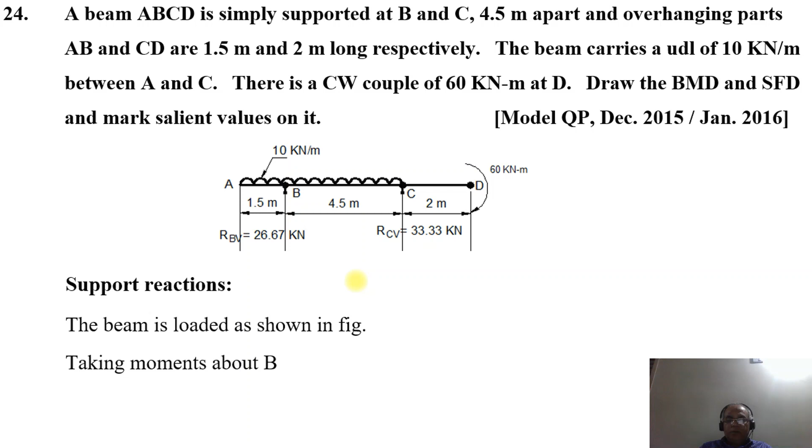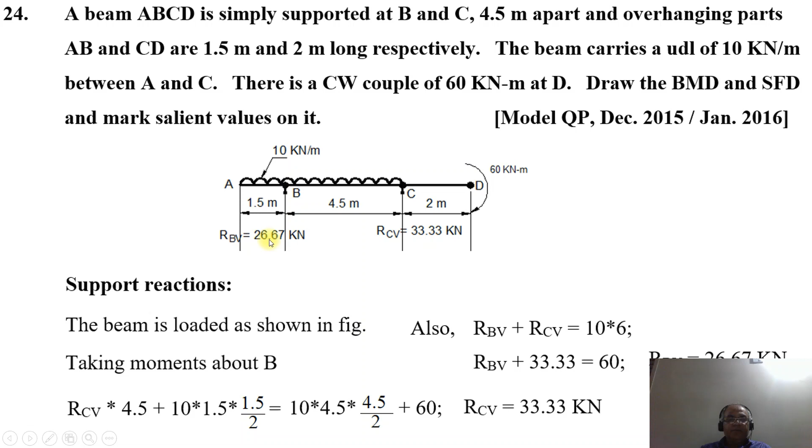And then also we know the sum of the vertical reactions acting upwards will be equal to the sum of the vertical loads acting downwards, which is 10 into 6. Therefore RBV will be equal to 60 minus 33.33, which is 26.67 kilonewton.

Now we are going to analyze this problem stepwise. Considering between A and B, with a UDL of 10 kilonewton per meter over 1.5 meters, and without considering the vertical reaction at B, SF at A will be equal to 0, and SF at B will be minus 10 into 1.5, which is minus 15 kilonewton. So from A it is 0, and at point B, without the vertical reaction, it will be minus 15 kilonewton.

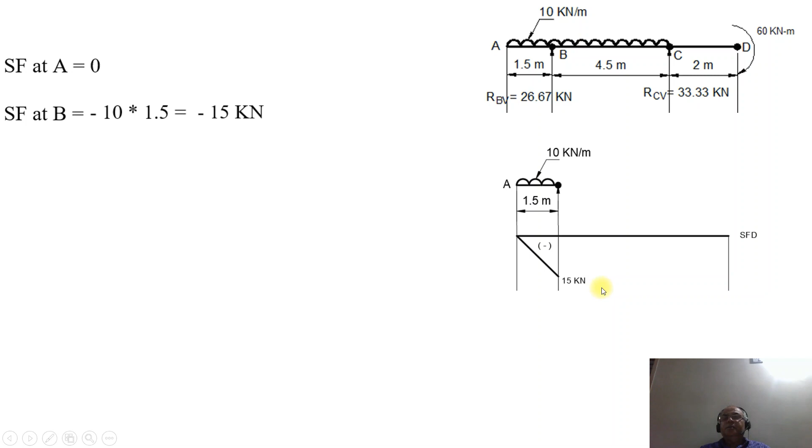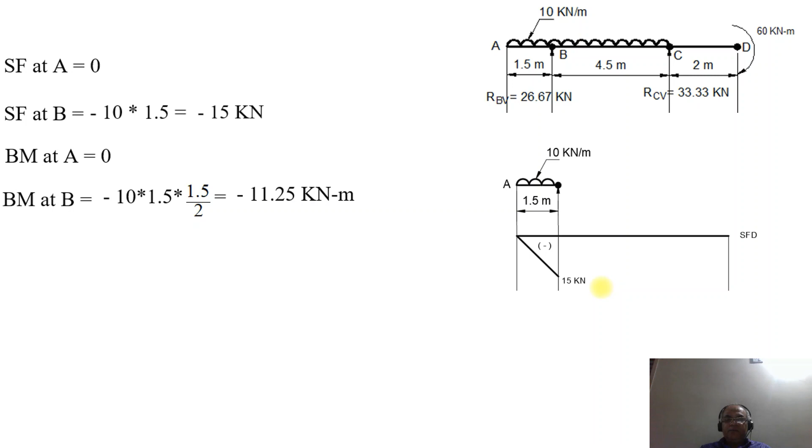Similarly, the bending moment at point A will be equal to 0, and the bending moment at point B will be minus 10 into 1.5 into 1.5 by 2, which equals minus 11.25 kilonewton meter. So the bending moment varies parabolically from 0 to minus 11.25 kilonewton meter.

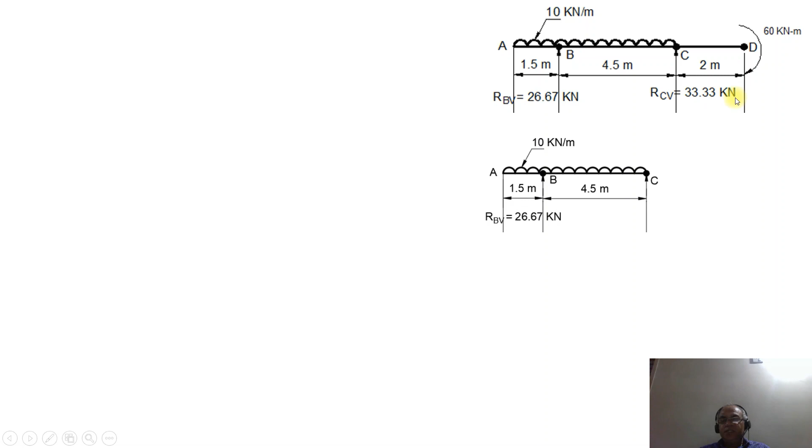Now considering the second part, we have RBV of 26.67 kilonewton acting upwards, and a UDL from B to C. We consider from B to C without the vertical reaction RCV of 33.33 kilonewton. SF at B will be minus 10 into 1.5 plus 26.67, which equals plus 11.67 kilonewton.

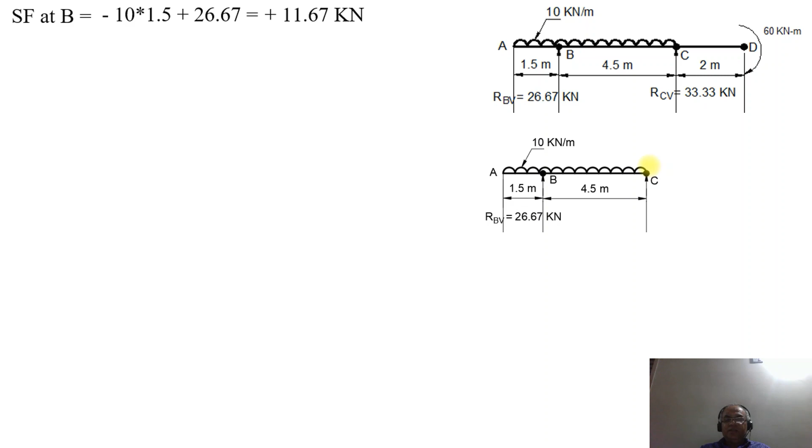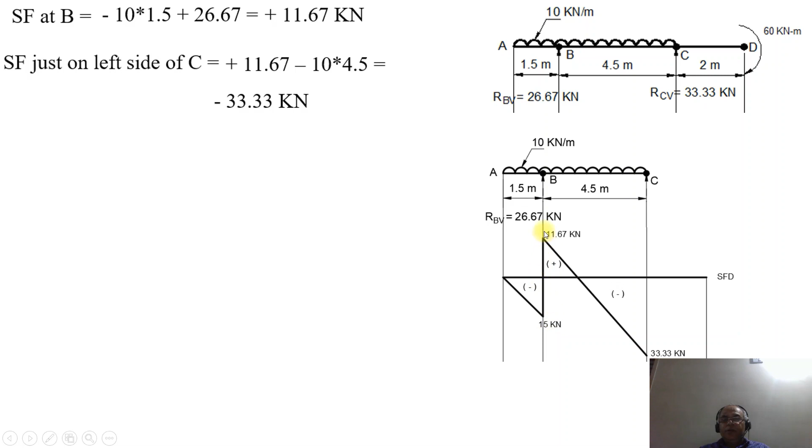Then SF just on the left hand side of C, without considering the vertical reaction, will be plus 11.67 minus 10 into 4.5, which equals minus 33.33 kilonewton. So at minus 15 kilonewton, due to the vertical reaction at B, it goes from negative to positive at 11.67 kilonewton. Then, only due to the UDL, it drops down from 11.67 kilonewton to minus 33.33 kilonewton.

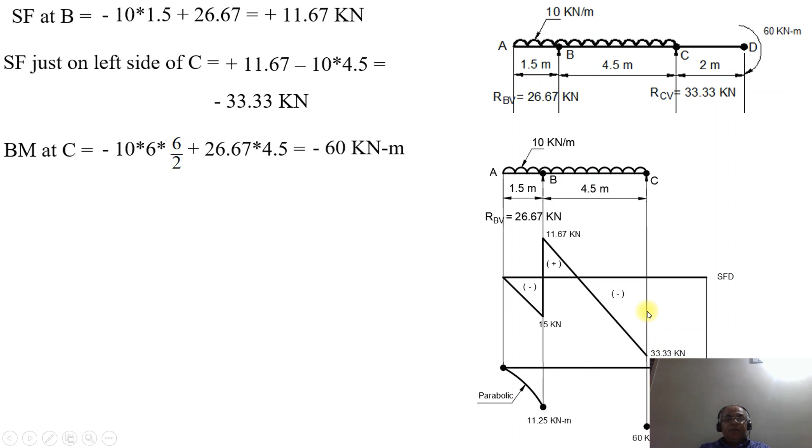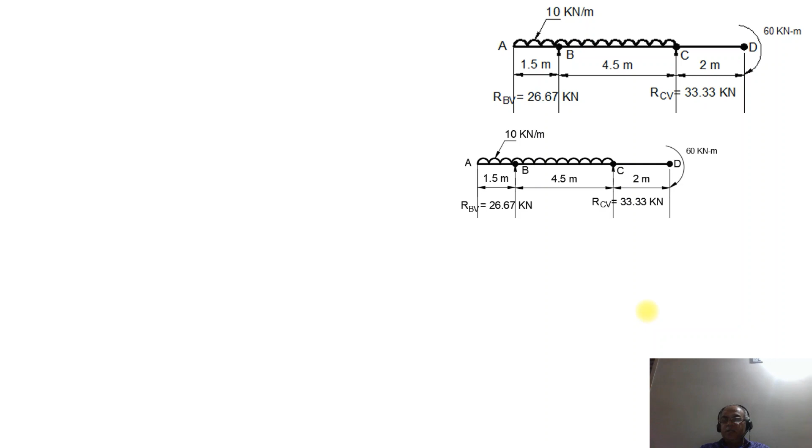Now similarly, we will consider the reaction at C, and also the couple at the point D, which is 60 kilonewton meter clockwise. So SF just on the right hand side of C will be equal to minus 33.33. Since you are considering the vertical reaction here, which is acting upwards, which is 33.33, it becomes 0.

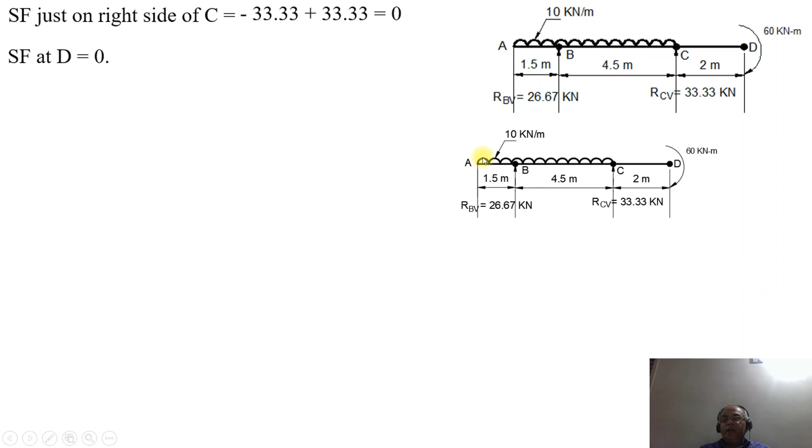So SF at D will also be 0, because we will not consider the couple at the point D for the shear force. As there is no other load between C and D, SF at D will become 0. So this is the shear force diagram. Once you get this, what will be the bending moment diagram?

The bending moment diagram will be: minus 10 into 6 by 2 plus 2 meters, plus 26.67 into 6.5, plus 33 into 2 will give you the bending moment at the point D without considering the couple. So that will be minus 60 kilonewton meter.

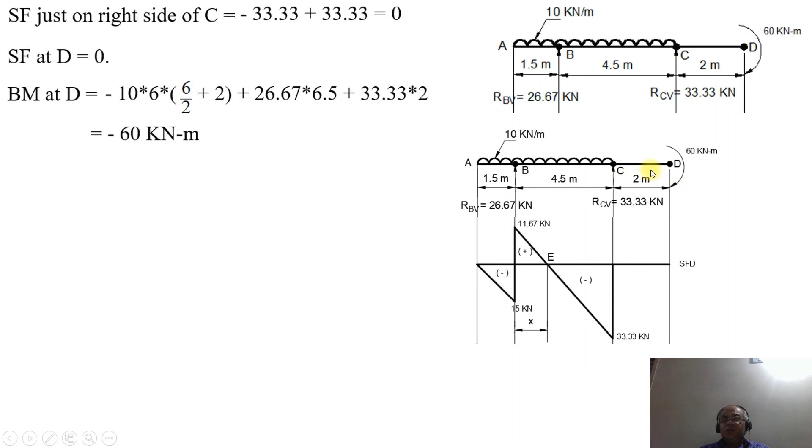So that is minus 10 into 6 by 2 plus 2. Then we have 26.67 into 6.5. Then 33 into 2. Both are positive because both the loads are acting upwards. This is without considering the couple. So the bending moment at point D will be equal to minus 60 kilonewton meter. Due to the clockwise couple at the right, minus 60 becomes 0 at this point.

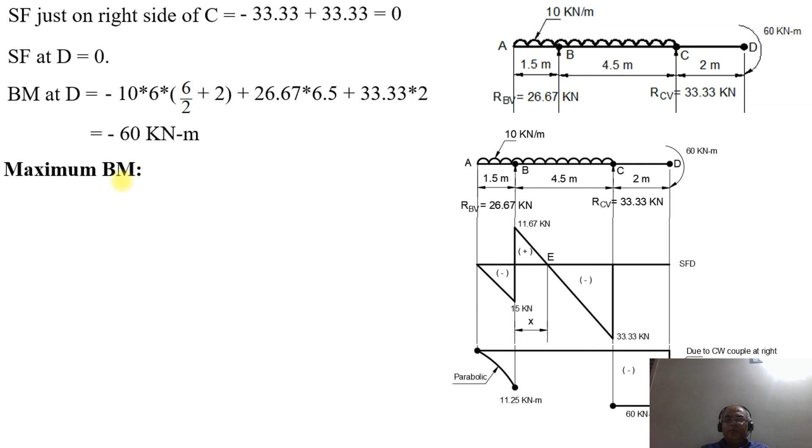Now, where are you going to get the maximum bending moment? You get the maximum bending moment where the SF changes its sign. SF changes its sign at the point E from positive to negative. SF changes its sign at the point B and also at the point E. Hence, the bending moment is maximum at these points.

Let E be at a distance x meters from B. SF at E will be equal to 0, which will be 26.67 minus 10 into x. So here minus 10 into 1.5 due to the UDL, plus 26.67 minus 10 into x, because we take SF at this distance. Naturally we need to consider the portion on the left hand side of the section.

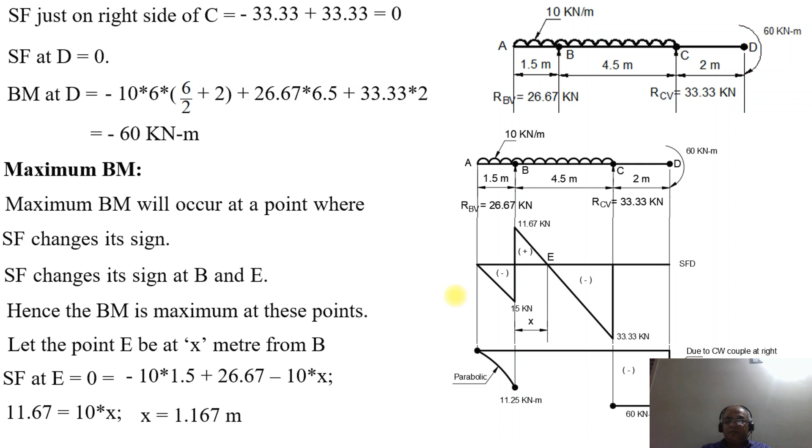So minus 10 into 1.5 because it is acting downwards, and 26.67, the upward reaction, which is positive. Then the UDL with respect to that section, which is minus 10 into x. Therefore, the value of x will be equal to 1.167 meters from B. So what will be the bending moment at the point E now?

BM at E: it is at a distance of x meters, 1.167 from support B, but the total distance is 2.667, because 1.167 plus 1.5 is 2.667. So minus 10 into 2.667 into 2.667 by 2 for the total distance, plus 26.67 into 1.167, the distance with respect to this support.

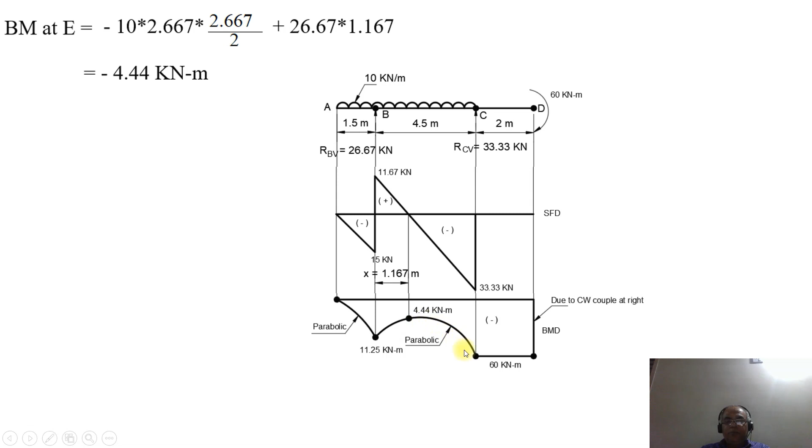Substituting, the value will be equal to minus 4.44 kilonewton meter. So the maximum bending moment occurs at this point, which is minus 4.44 kilonewton meter. Since between B and C there is a UDL, you have a parabolic curve, which is why we join these 3 points by a parabolic curve. This is how you analyze both the shear force and bending moment diagram, and this is the final solution.